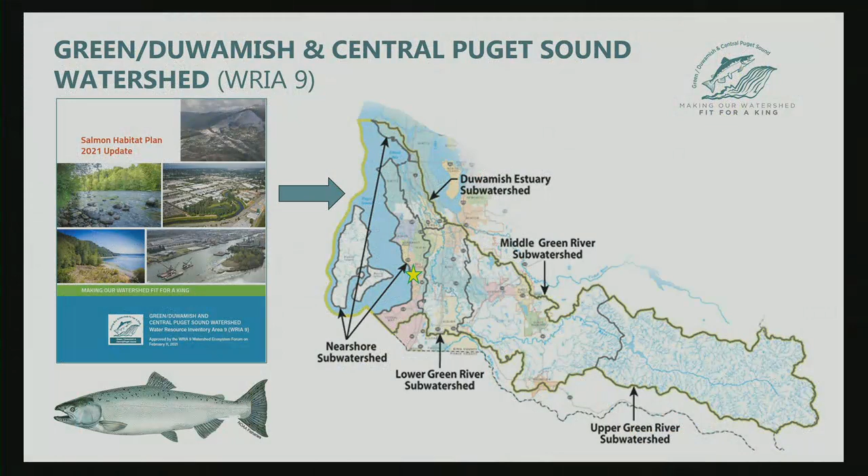Fast forward to today, we're 25 years later. This salmon habitat plan serves as the blueprint for our investments in salmon recovery in the watershed. If you look at the map, WRIA 9 is a diverse watershed, about 575 square miles. For planning purposes, this is broken up into 5 sub-watersheds.

For the city of Des Moines, it's located within the marine nearshore subwatershed that spans from Seattle down to Federal Way. In total, the plan identified 39 habitat projects in the marine nearshore subwatershed, and 3 of those are located within the city of Des Moines. As Alex mentioned, in 2023 WRIA 9 awarded the city a grant to explore the feasibility of integrating salmon recovery and salmon habitat in addition to flood risk reduction and recreational opportunity at Des Moines Beach Park.

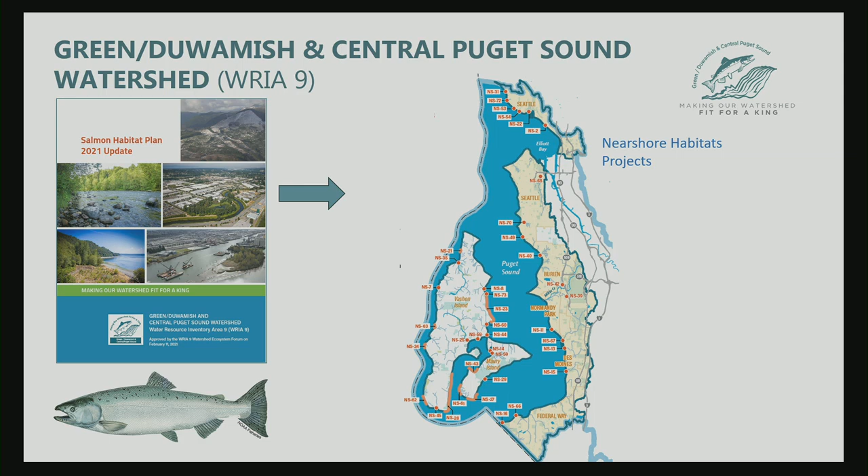Here in the marine nearshore area, we're really looking at supporting rearing and foraging habitat for juvenile fish, not the big salmon that we all love to catch. We're talking about the size of your finger when they come out of the river. These shorelines are productive areas. They support diverse prey items such as invertebrates, forage fish like herring, surf smelt, sand lance, as well as provide eelgrass and other areas that serve as shelter for juveniles.

Again, no surprise, historical development patterns have profoundly impacted the shoreline across Puget Sound. Within WRIA 9 alone, we have 92 linear miles of shoreline, about 2/3 of that armored with seawalls, revetments, bulkheads to protect the shoreline. So what does hard armoring do? It's intended to protect the shoreline, but at its fundamental value, it's disrupting sediment delivery and sediment transport. That can lead to narrower, rockier beaches, fewer invertebrates, decline in forage fish spawning habitat, and even the loss of eelgrass beds.

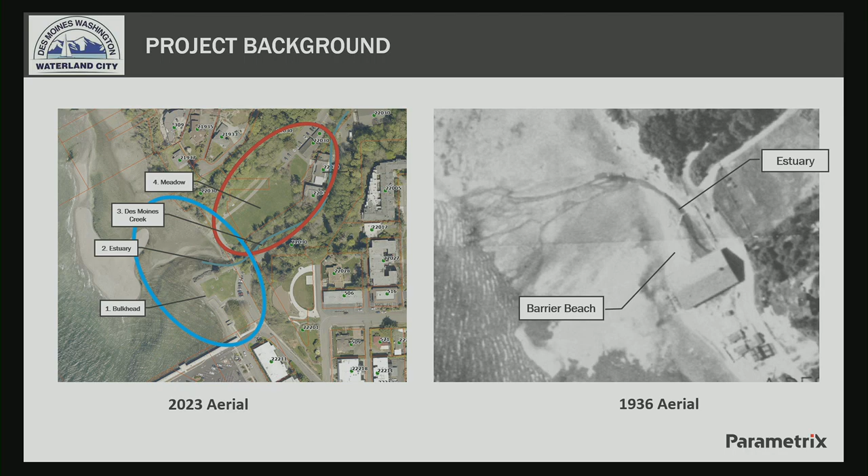In our case, this is one of the earliest aerials available of the site. You can see Des Moines Creek on there, but a lot of the development and changes occurred well before this, so they've been there for a long time. There's not a lot of what we call analogs to follow as far as what was there before, something we can go back to.

So we mentioned early on that every project has some sort of constraints on it. We're going to talk a little bit here about physical constraints, or what we might define as technical constraints too.

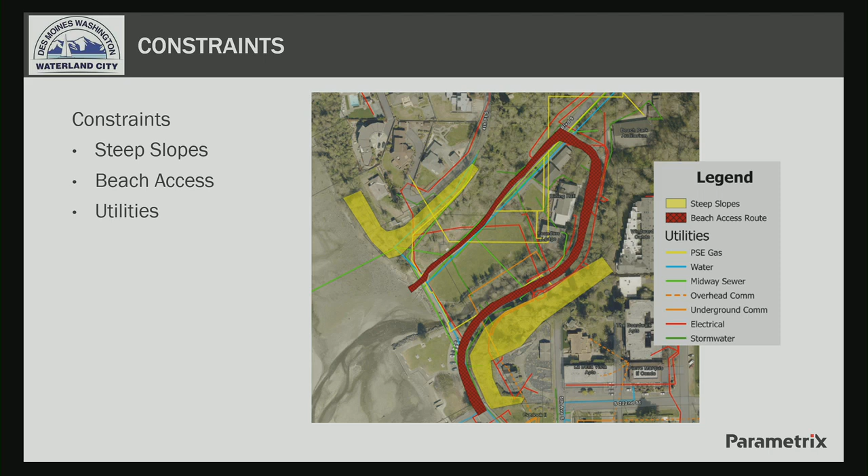And then lastly you see lines scattered all over the plan—those are existing utilities. So every time we're digging in the ground, call 811. Those are things that would factor into any changes we make, normally resulting in possibly moving utilities around and so on, which are typically additional costs and considerations when making design decisions on these restorations.

So now we're going to start going. Nikki's going to start taking you through some of the alternatives that we're going to talk about.

Thanks, Paul. My name's Nikki Redden, and I'm a project engineer with Parametrix.

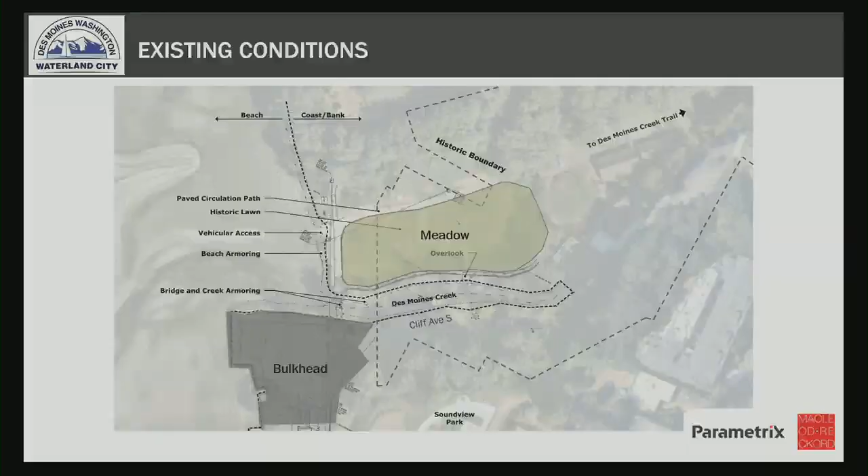Starting with our existing conditions for the meadow area, we have a historic boundary on our site. A good portion of our project site is on the National Register of Historic Places, so any project work within this boundary will likely be restricted or require construction approval.

A couple important points on our site: we also have a pedestrian circulation path on the outer perimeter of the meadow, and this path includes an overlook up on Des Moines Creek. There's a pedestrian bridge connecting the meadow to the bulkhead area, and we also have that vehicular access point that Paul mentioned in the constraints slide.

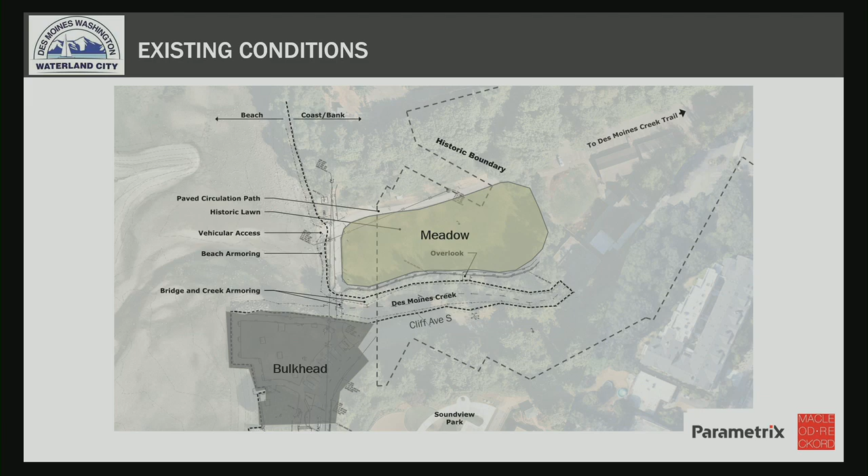We know that flooding impacts are one of our main project goals, so we wanted to take a look at existing floods we've seen on the site, as well as some future anticipated flood events based on sea level rise. We know more impactful events will be coming because of sea level rise.

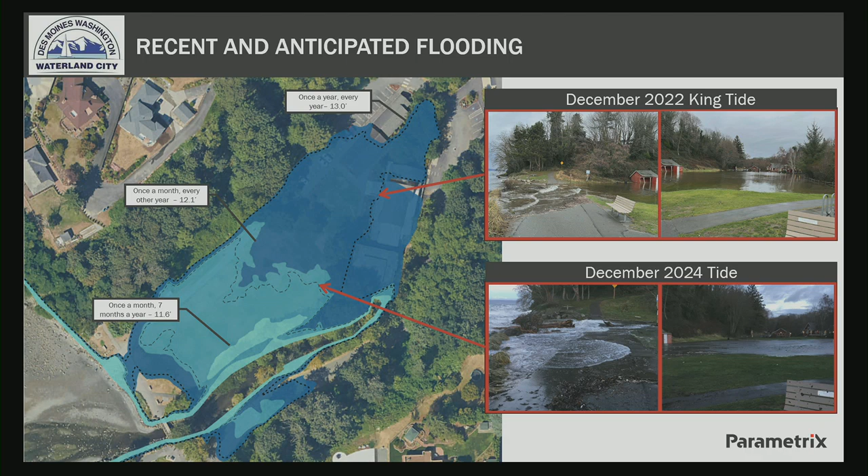With those flood events in mind, we're not expecting there to be much of a low or no action alternative on the site, if we're expecting the site to stay the exact same usability as it is right now. We expect the grassy lawn area may die off or transition to more salt tolerant plants, or at the very least require much more frequent maintenance to remain the same grassy lawn it is today. We're also expecting some damage to the vehicular access point, the pedestrian loop, or the pedestrian overlook due to frequent inundation.

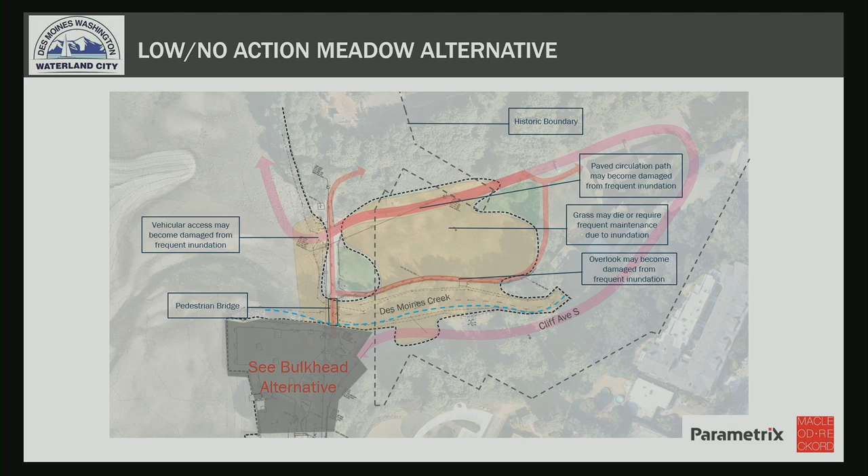Can I clarify something? So in this 2100 scenario, we're not talking about damage only happening in December and winter months - it could be any month that reaches that 13-foot level. Correct, yep. And so at that point, the meadow could be unusable on a regular basis and move to more of a complete part of the estuary rather than just a lawn. Exactly. Okay, wanted to make sure I got that right. Yep.

Since we're not predicting much of a low or no action alternative, the city staff, our team at Parametrix, and our teaming partners wanted to strike a balance between maintaining as much of the existing park usability as possible and addressing these flooding impacts along with all of our other project goals.

What we have here is our staff preferred alternative, which opens up the mouth of Des Moines Creek and creates some estuary intertidal marsh habitat. This would include taking away some of the hard armoring around Des Moines Creek and along the beach line, adding back in a more natural shoreline, and allowing some of the lawn to transition to an estuary habitat while still maintaining that beach access route.

This would require moving the pedestrian circulation path a little bit and altering the bridge location. We would still have to raise the green or lawn area up out of the flood elevation.

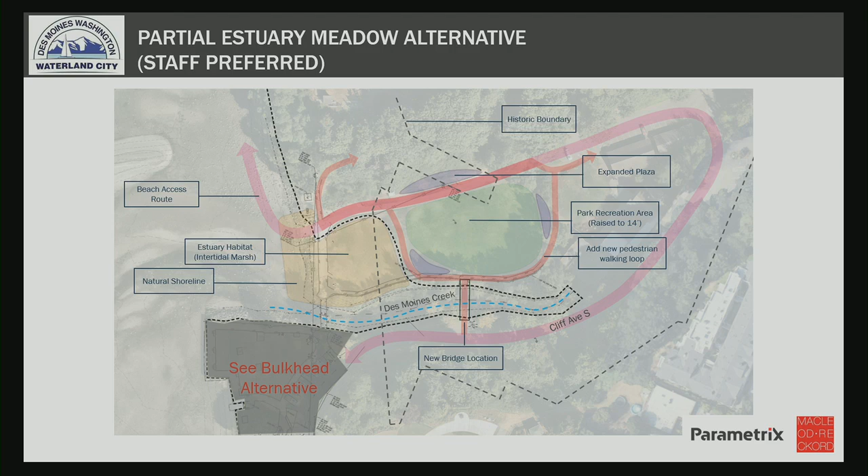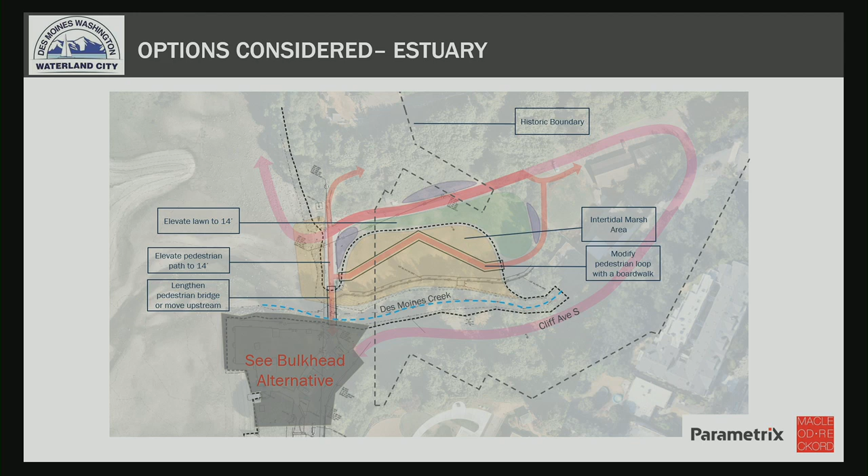One option considered was a larger estuary alternative, which matches the points already frequently flooding on the site. We ultimately decided against this option—partially because while it does create new estuary habitat and address flooding impacts, meeting the other two goals, it does not create any new shoreline habitat and reduces the amount of park area.

We also considered a maximum estuary alternative, where we would again open up the mouth of Des Moines Creek, creating a more natural shoreline and still putting in a public access walking loop. This meets most of our project goals but doesn't have that connectivity point to the Des Moines Marina.

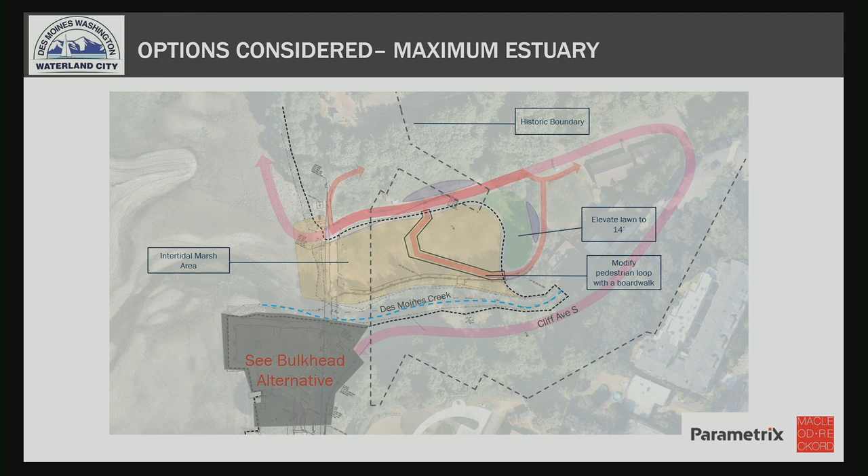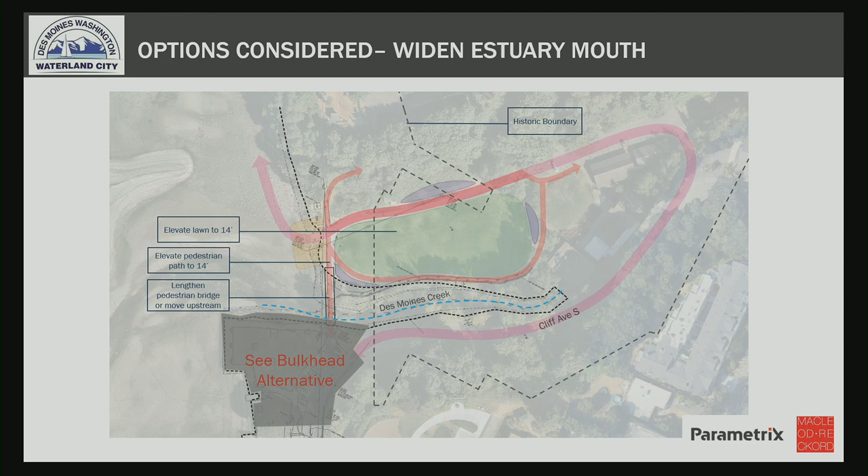Then we also considered widening the estuary mouth. This would maintain a lot of the park usability, but would require lengthening that pedestrian bridge and would create only minimal estuary or shoreline habitat.

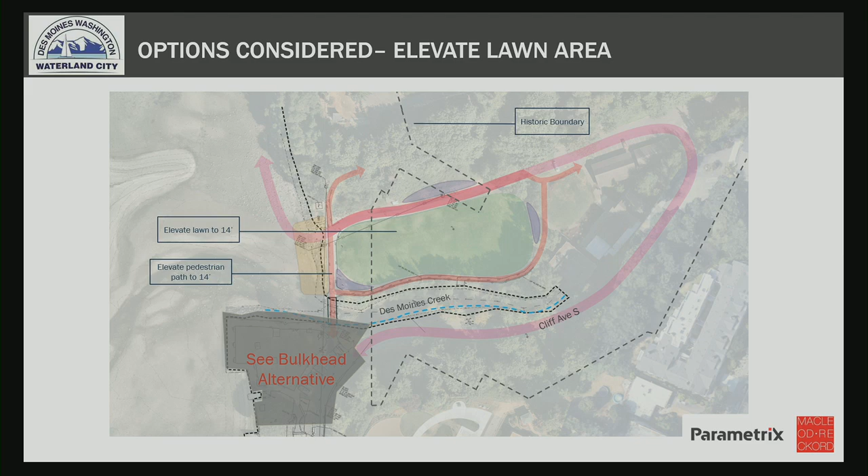Then finally, we also considered simply elevating the lawn area up out of the flood zone. But again, this only meets a few of our project goals, and so the staff landed on this staff preferred alternative. So we do have a few other photos to help really illustrate this alternative.

You can see on the right there a photo from the Nisqually Wildlife Refuge that kind of helps illustrate what really an intertidal marsh or estuary habitat area would look like.

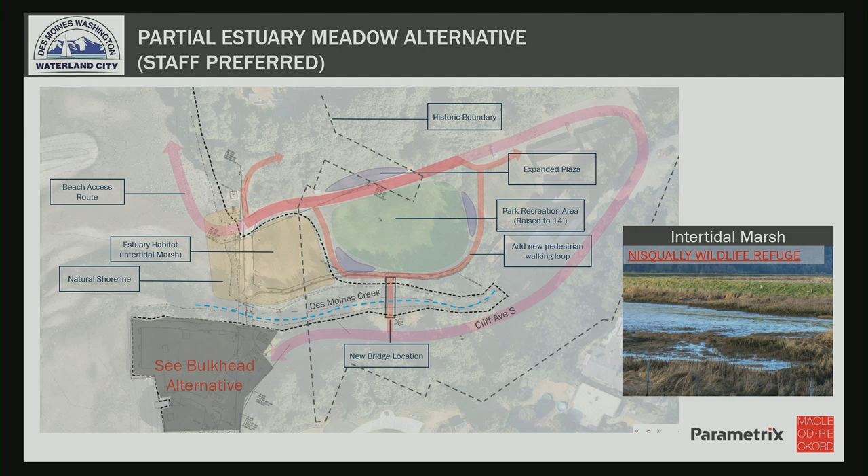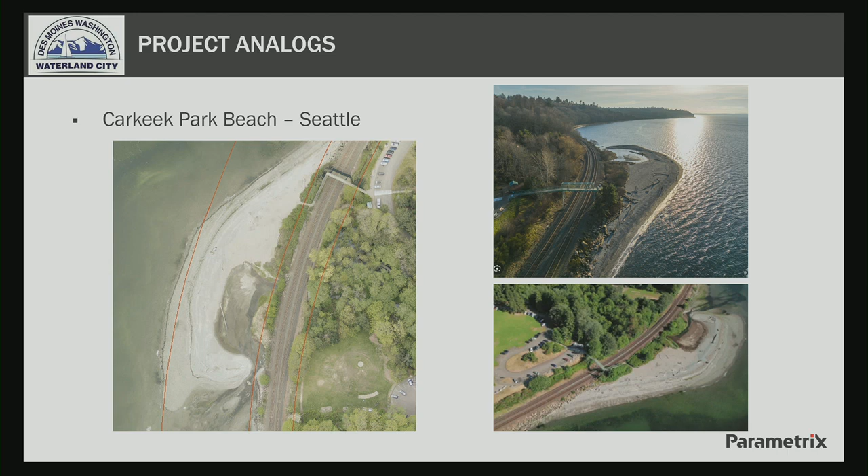So that concludes our meadow area alternatives. Now we'll go into the bulkhead area alternatives.

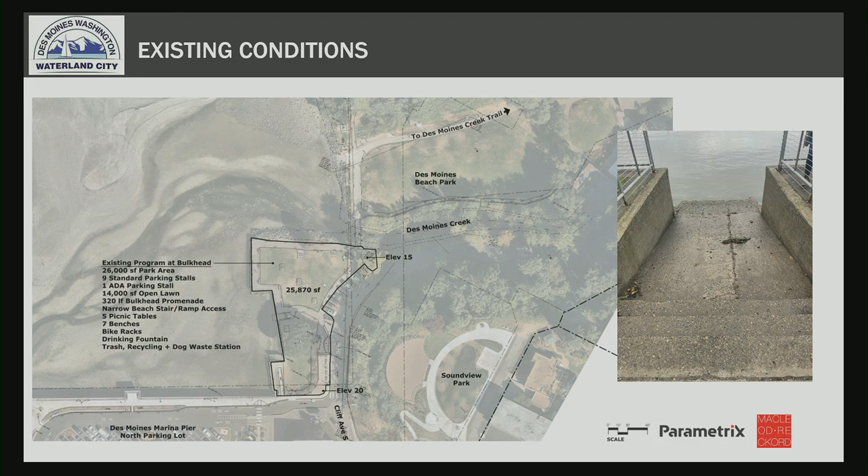There is one public access point to the beach from here. You can see the photo on the right. It's kind of a mix of a stair ramp access.

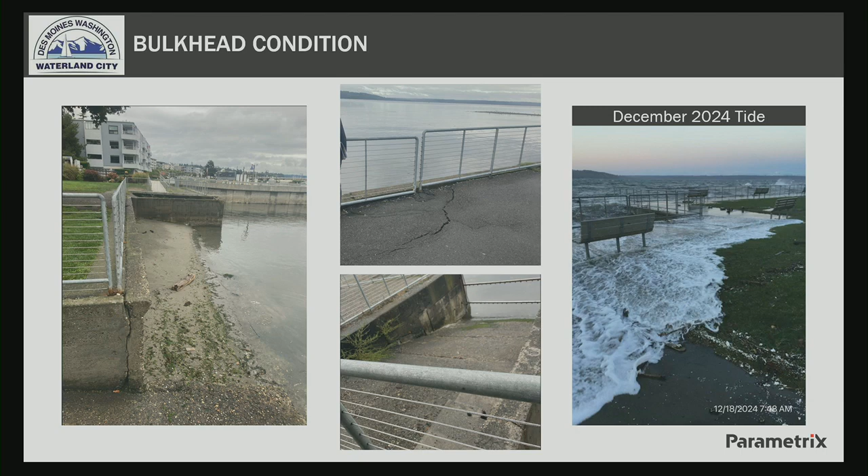The existing condition of the bulkhead is we're seeing signs of failure like the concrete cracking, some asphalt cracking. One of the ramp access points has already been closed off. And we did actually see water from the 2024 tide up over the bulkhead, and that exacerbated some of these problems. We already are seeing an increase in the cracking from this one event.

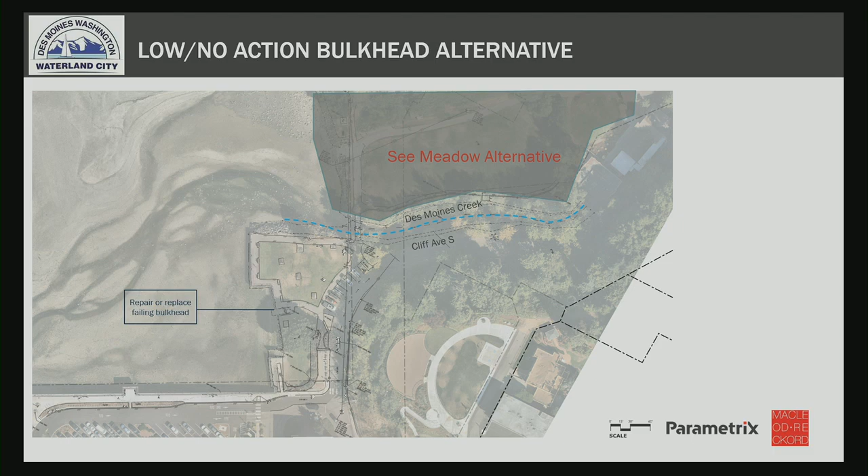So again, with that in mind, we don't see too much of a low or no action alternative. Repairing or replacing the bulkhead in kind, we kind of expect to be a little bit of a permitting challenge, or we expect that it would require mitigation.

So again, like the meadow area, we did consider a few other options that I'll go through now just to give more context into how we landed on this alternative.

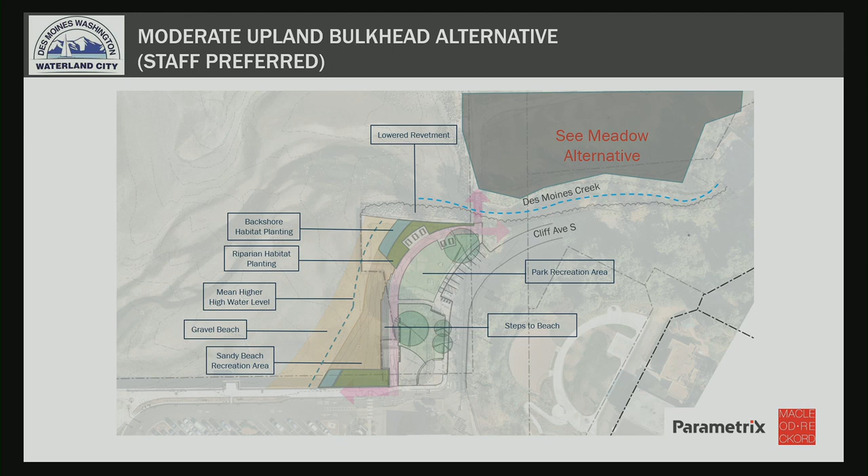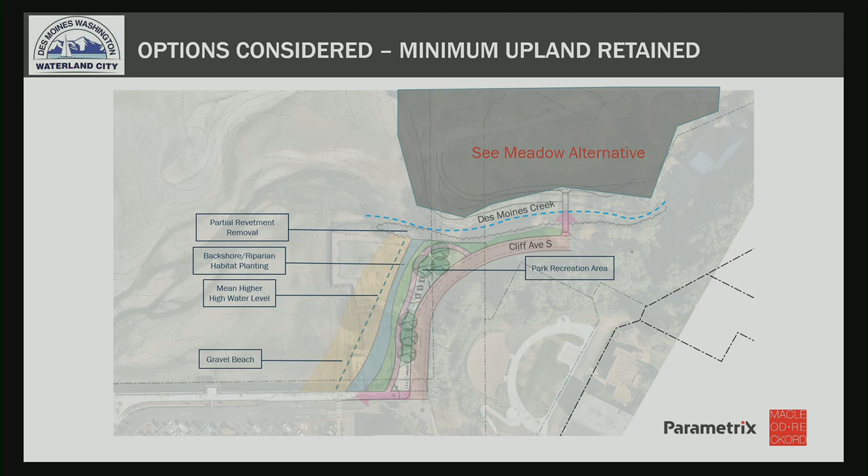We did consider a minimum upland retained alternative where we actually pulled back a lot of the bulkhead wall. This would require getting rid of the parking spaces that are there, but allows us to remove some of that revetment and pull back any of the elevation that's kind of above the mean higher high water level. And it would look similar texture-wise to the other alternative, a gravel beach, followed by some backshore riparian habitat plantings, and then the upland area.

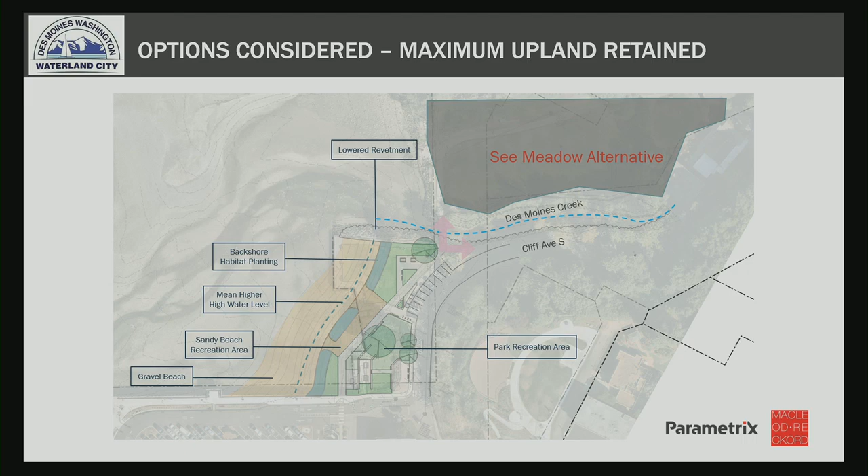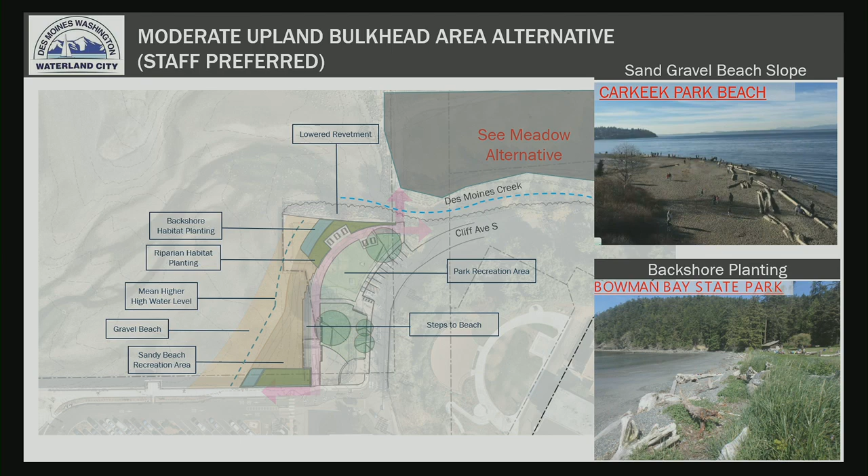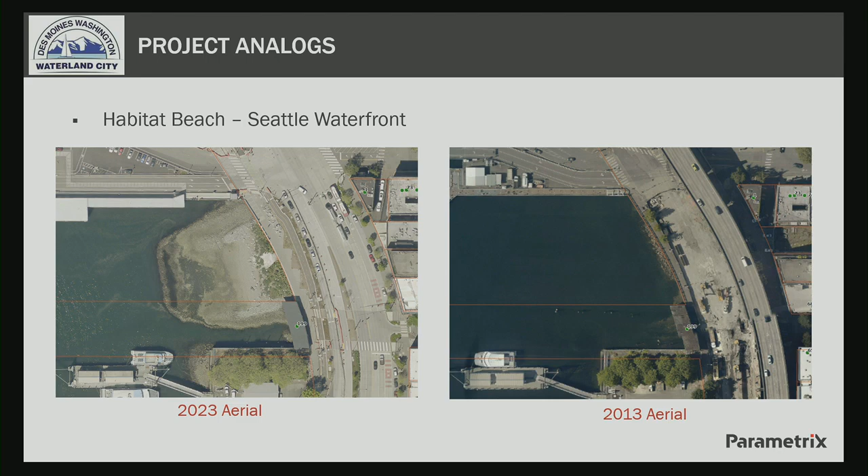And we also have a project analog up in Seattle, in Pioneer Square, the Habitat Beach. This provides a good example of the built environment, and then building a habitat beach waterward of that built environment. It has a lot of similar features to what we're expecting on our beach site, like a rock revetment that is protecting the beach, a similar gravel beach slope into the intertidal area with some backshore habitat plantings. So we do have one last slide, and here's a

Colleagues, take it away.

One additional note: we are bringing this to the full council later this evening as well. It'll be a much reduced version of this presentation, but that's another opportunity for Q&A.

It looks like my colleagues are mulling for a second, so I have one quick thing and then I'll check in again. Is there any money in this, or do we need more to develop some kind of 3D model for your preferred alternatives? I think the public will want to have a sense of the elevations, and the aerial is fine, but this is a strategic thing.